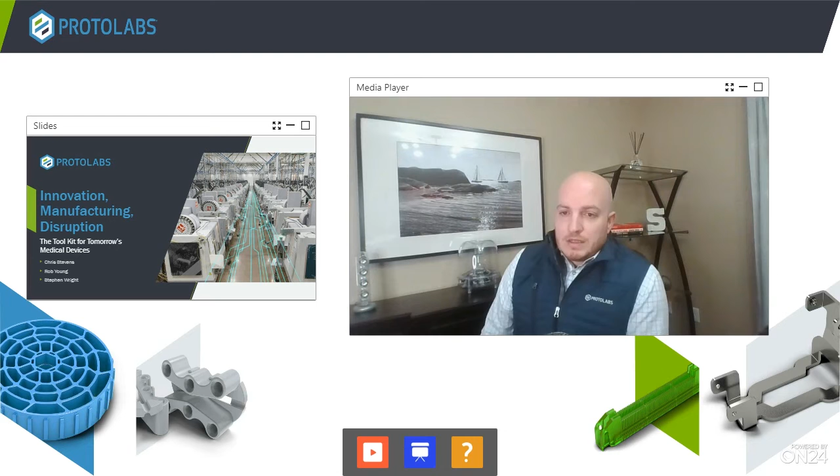So I said I need some help. Let's go get Rob and see what he has to say about it.

Thanks, Chris. Being that we're at the Medical Design and Manufacturing Conference, I'd venture a guess that most of us in the room have spent some time around manufacturing, and most of us have run into situations where a little time savings or acceleration in the manufacturing cycle really goes a long way. So the question of how important is speed, or how much should I prioritize speed, has a definitive answer: it definitely depends.

Nothing is ever as simple as it seems in manufacturing, and this subject is no different. There are so many variables unique to you that you're really the only person who can truly answer that question, but there are helpful things to think about and questions you can ask that get you well on your way to answering it for yourself.

So things like your stage in the development process. For example, are you in early stages right now, or in late stages? Typically when you get into later stages, it can be hard to change things, so people get the most value out of starting with a faster manufacturing process and carrying that through the entire development process. Number two, level of innovation, which is a big one we're going to talk about on the next slide.

Are you releasing something that's new and groundbreaking, or something that's an incremental update to an existing product? That level of innovation can really impact the processes and make speed more valuable, and we'll explain why in a moment. Level of design risk: how risky is this product?

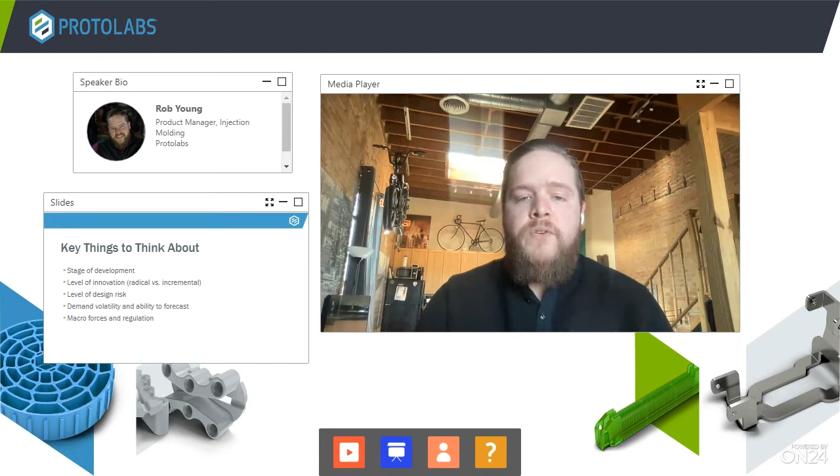They're really the topics that shape how important speed is. But there are also a couple of questions that become really important here too. For medical specifically, a lot of the speed advantage comes in the form of risk mitigation and time to market for new products, and this really applies to accelerating prototyping and development.

When we're in this stage, two questions become quite important typically: how many products are we releasing as a team, as a company? How many times are we going to go through this cycle? And how much design risk do we have?

If you're releasing a lot of products, you get this aggregated benefit of speed and time saved that compounds from product release to product release. What it really does is help minimize downtime and enable you to complete more without having to expand your team, especially if those products are highly iterative or have a lot of development gates to get through.

Condensing those timelines is generally really helpful because you're simply able to accomplish more in less time. If the products also carry inherent design risk, as many of our medical devices do, speed also becomes a big risk mitigation tool. Maybe your product launch timeline is static, and it's not easy to change those things most of the time. In that case, accelerating the development process means more iterations, more testing and learning, more optimizing, and ultimately a better chance of successfully clearing regulatory standards and launching the product as a success in the marketplace.

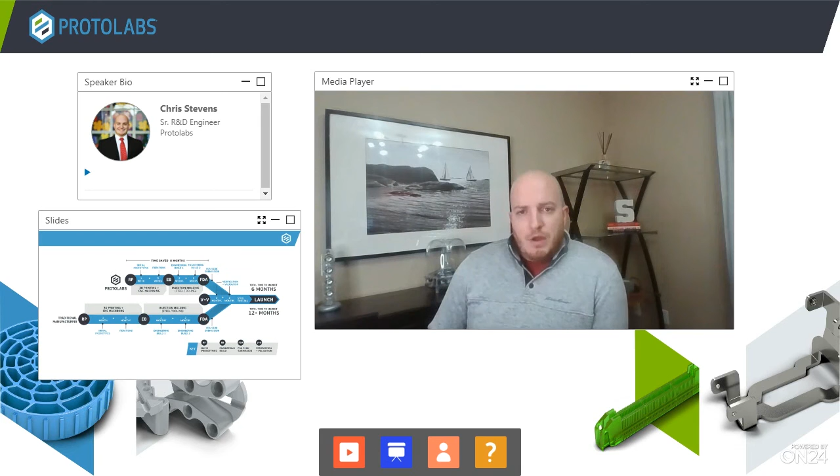So as we look at this and say, okay, multiple technologies, makes sense. Everyone kind of knows that. But what are some of the takeaways from all of this? I've come up with 5 different things to think about as you're working through this process. This is focusing really on that transition phase of going from 1 to hundreds or thousands or millions. And the biggest one we can't tell people enough is risk.

Think about risk. As Rob talked about, there's different risk levels where you can deem it appropriate, or hey, you know what, this isn't just right for us at the moment.

Don't forget about the manufacturing process. You often focus on the product, but the manufacturing side is also just as valuable. And what I mean by that is, know to yourself, hey, if we are going to go to millions of parts, don't think of it as like, oh, we're going to 3D print 10 million parts. It's just probably not feasible, or vice versa.

If you're going to design something for multiple millions of parts but only make 100 of them, it doesn't really make a whole lot of sense.

Now, what does that have to do with risk? From this standpoint, with many medical devices, once you lock in a process, it's really challenging or difficult to shift out of that process one way or another, unless you go in with the approach of what if we qualify all of them down the line, as we move through that R&D process, as we saw in the previous page.

That leads into our next point: plan with speed in mind, design, test, and iterate when possible. What I mean by that is focusing on that early stage of how do I make 1, 10, or 100, but do it really, really well and learn at a rate that's just not feasible if you go down the high manufacturing route of multi-million.

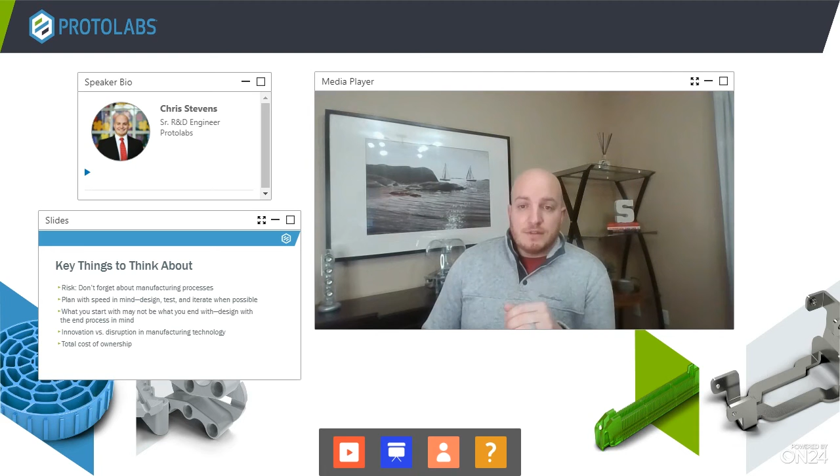So the biggest and most important question we always get is: can 3D printing really take over production? And again, this goes directly into that question of total cost of ownership—what if I don't have to buy an injection molding tool and I could just print everything? Great question. I'm going to hand it over to Stephen. He's going to tell us a little more about that. I'll catch back up with you in a little bit.

Thank you, Chris. My name is Stephen Wright, and I'm a senior account manager here at Protolabs, as well as the product sales leader for the 3D printing service line. I've got the incredible opportunity to not only work on the front lines with our customers, but also to help shape what 3D printing looks like here at Protolabs today and in the future.

Now that you've heard from Chris and know that 3D printing is a way to quickly prototype and analyze if a part will fit your needs for verification and validation activities, there's a lot to consider when developing products. You have things such as geometrical fit, its fit to other components, fit within packaging materials, fit within procedural kits or offerings, and the list goes on.

There's additionally ergonomic fit to consider. We understand that in the medical industry, it's important to receive validation that the ergonomic fit is agreeable, and you have to ensure that your human factors engineering plan is solid.

Not only that, we also have material fit. We understand that material selection is key for you based on your performance goals and risk assessments for the project. Needless to say, it's true—3D printing is an unbelievably valuable tool for prototyping parts for fit and form.

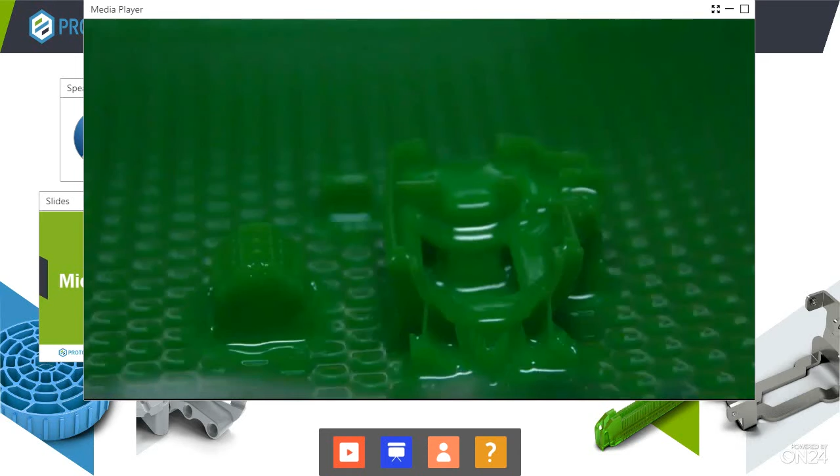Here we're taking a look at the Microfine 3D printing technology. It's an SLA technology, fantastic for printing small parts with fine resolution and very minimal layer lines.

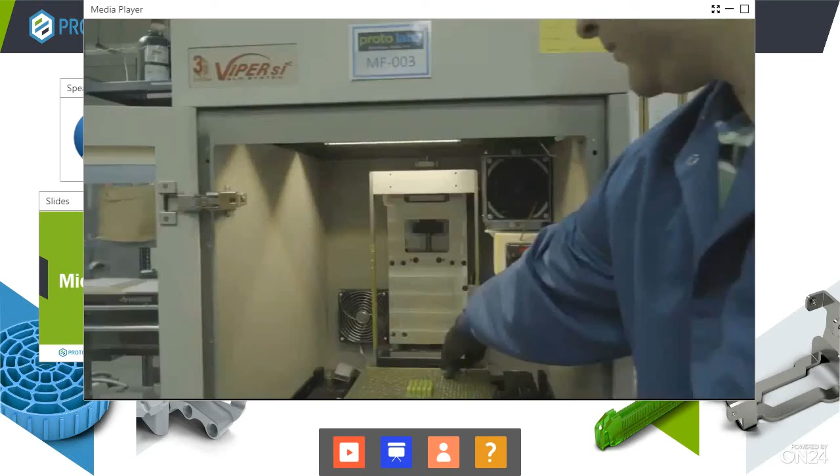As you looked at the screen there, you saw a video clip of some of the components we can build to support the medical industry, which we know moves at a very fast and iterative pace. The high precision required on these parts is likely why the customer leveraged our microfine, micro-resolution material. In this case, the parts are green, but the microfine material is also available in gray if that's more your speed.

What you're seeing here is the stereolithography 3D printing process, which has been around since the late 1980s. It's a process that provides fine feature details and high resolution, something that's a little harder to achieve with other 3D printing technologies such as FDM, or fused deposition modeling.

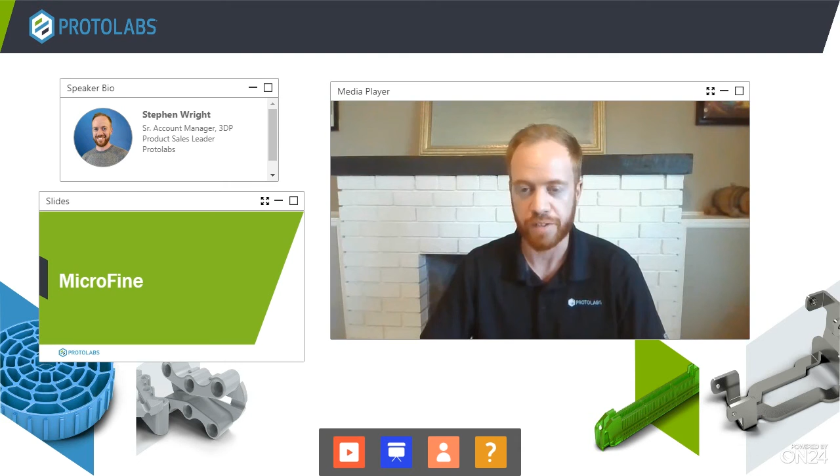There are a lot of other ways to think about the use of stereolithography. Take, for example, a part that Protolabs made to help support ventilator production supply chains last year. This part was 3D printed because the tube geometry was not achievable using conventional manufacturing processes, and the final design helped avoid the usage of multiple parts. This coupler design had initial design requirements involving space constraints, and producing the final design additively with stereolithography allowed for a solution.

Now, we have a lot of other 3D printing technologies you can utilize to help benefit your product development in the medical industry. Take, for instance, Carbon. 3D printing is becoming a quick go-to solution for the right production use cases, and Carbon is one of the best technologies we have for that. I'll show you a quick clip here of the Carbon technology in action.

The Carbon digital light synthesis process offers engineering grade materials and a way to scale production parts that aren't crossing the pricing thresholds that make injection molding an appealing option. Multi-piece consolidation of nozzles, rigid mounts, housings, and snap fit features are all an excellent use case for medical applications, and they're all easily attainable with the Carbon technology.

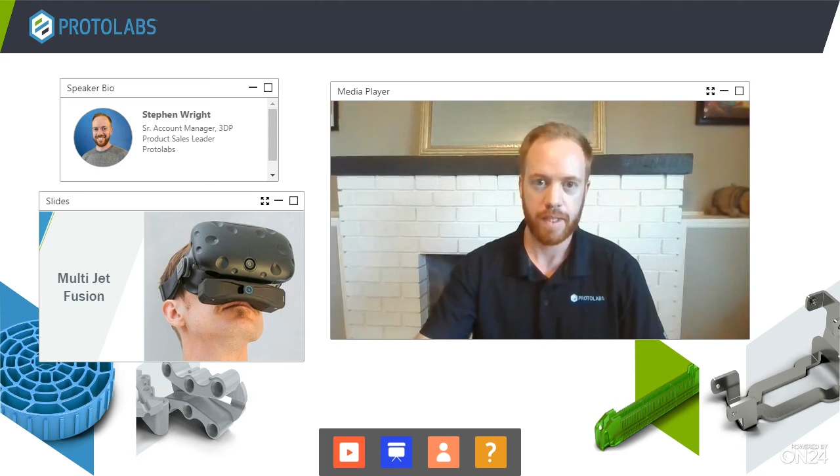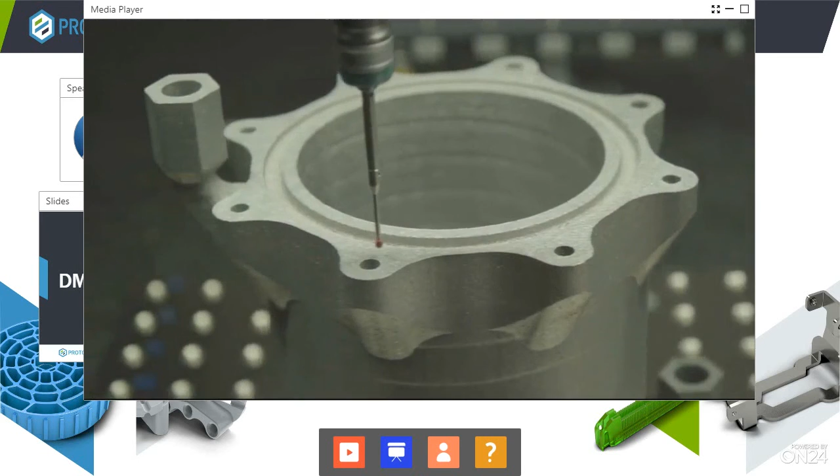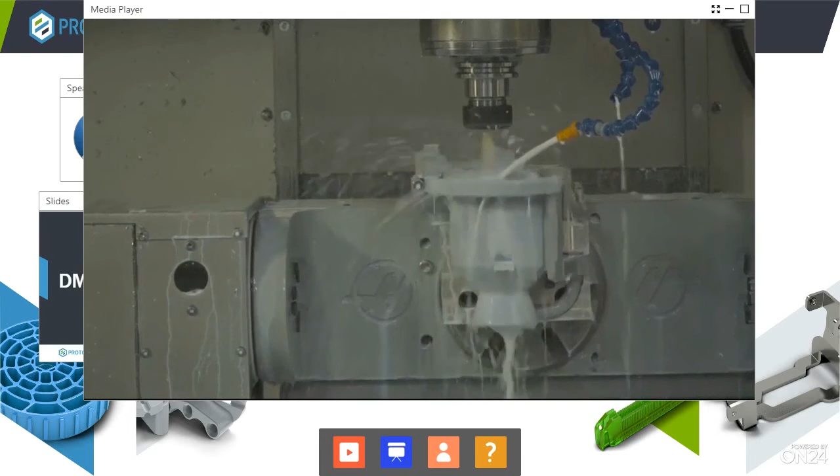To close it out, it should be no surprise that metal 3D printing is making moves in the medical industry as well. Here we can take a look at some of the different types of parts we make in DMLS most commonly. These appear to be a little more engine-type components, not necessarily medical, but the cleaning capabilities with DMLS are absolutely fantastic. We can do post-processing, post-machining—a lot of different options available to you.

As we progress forward, we are seeing a lot of medical device prototyping with our metal materials, but we're also seeing a lot of projects requiring turnkey production parts to move through our plant, and we're able to handle any of those requests. Whether you need post-process machining, powder analysis, material traceability, mechanical testing, heat treatments, or quality inspection reports, we can accommodate all of that.

The industry isn't slowing down at all, and we intend on keeping up with it as we move forward here at Protolabs. So we certainly encourage you to reach out to us with any needs you have within the medical industry. We'd love to hear what you're trying to use this technology for and help support you moving forward.

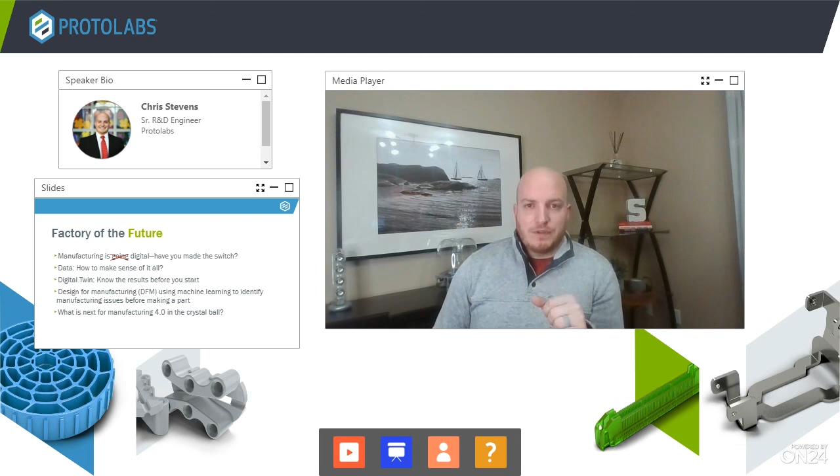Let's do a little quick recap here. So speed, how important is it? And unfortunately, the story is pretty true: it really depends.

As you've heard throughout this talk, there are a lot of different factors playing at hand here, and understanding where your risk is and where you're willing or able to take a riskier bet to edge up on that, so you can maybe get that advantage over your competitor.

Now, as you take that into consideration, we move into manufacturing technology. We talked about pairing the right technology or manufacturing process with where your product life cycle is. Don't go for the gung-ho home run solution out of the gate before you've tested or validated your product. Edge up to it appropriately, that way you're keeping your investment smart and risk adverse.

What's important to mention too is it's not just understanding what technology, but playing that transition period of prototype to production. How do you make that transition? Are you taking into consideration all the potential risk factors, all the things that might happen, and ensuring your design is indeed ready for the future and not going to cost you down the road after your product's been on the market?

Next, we go into 3D printing. Stephen mentioned there are a lot of great technologies out there, a lot of things happening around the space, and it's moving quite quickly. From ventilator parts that could have been made in multiple injection molded parts made in a single assembly, to jet engines and rocket engines, it has a tremendous amount of opportunity. We've debunked, like many in the industry, that 3D printing in the right application is absolutely a viable production need, focusing on that total cost of ownership, as we talked about a couple slides ago.

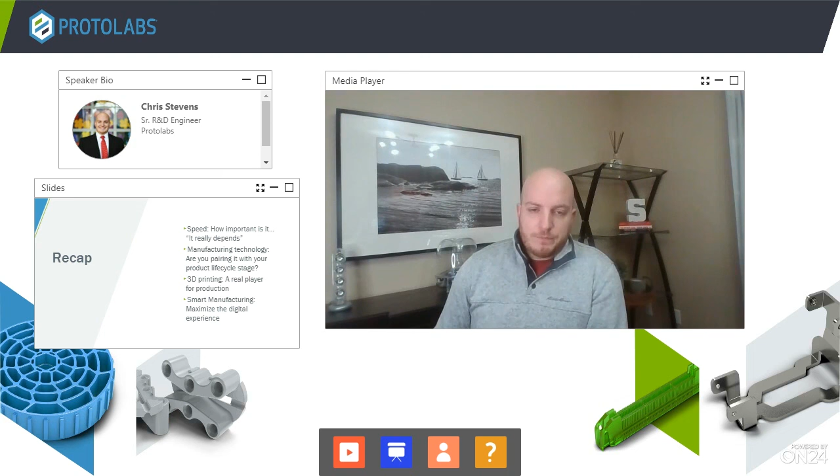So, closing thoughts. I want to leave you with one thing we always talk about at Protolabs: innovation starts with one bold idea. It can be small, big, medium, of all sizes. What was fascinating about the medical industry, and what we've always gravitated toward, is that it only takes one bold idea to improve the lives of many. So what we're hoping you take away from this is how do you transition from that bold idea to improving the lives of many?

Hopefully today's talk gives you a little insight there, or at least begins to ask some questions and have some conversations around how we might be able to help, or who else in the industry can help you tackle these challenges.